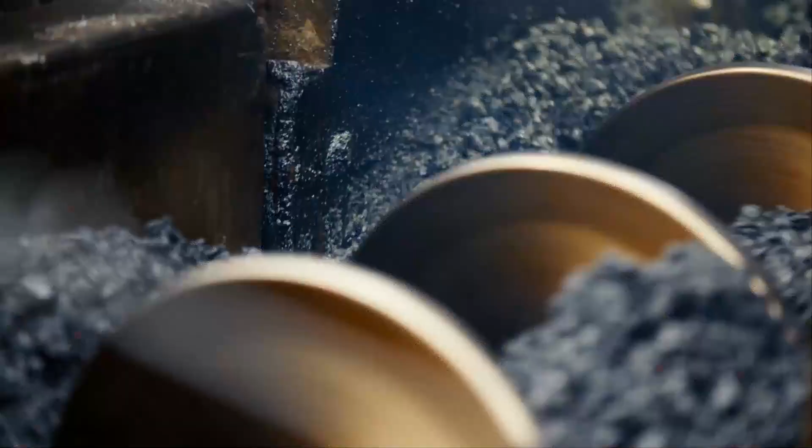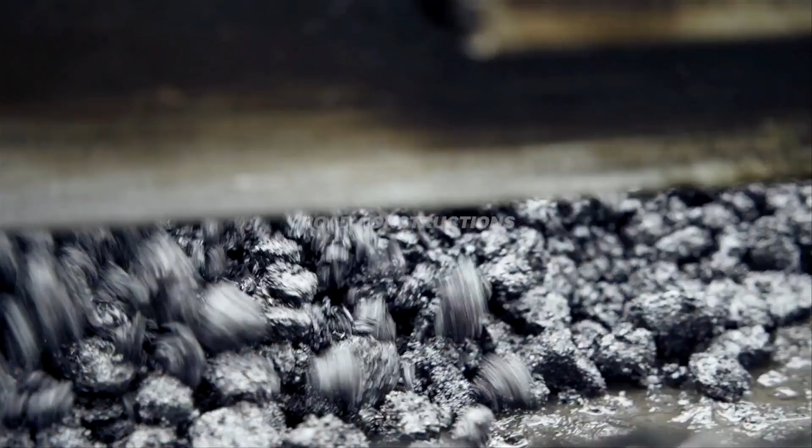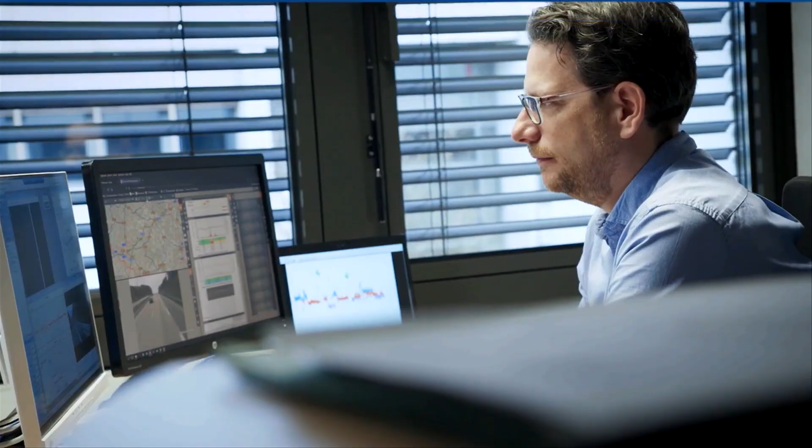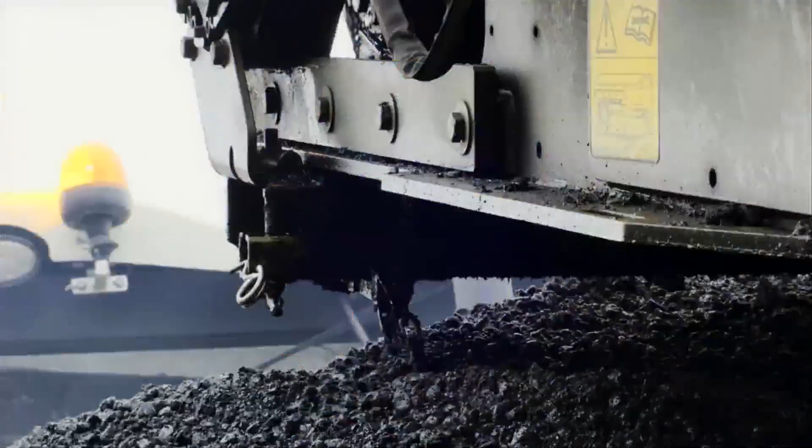What does it take to make a journey smooth and enjoyable? Most of all, it's the road itself. A good road surface is often taken for granted, but every smooth road is the result of a deep understanding for road construction, management, and interpretation of data. The FEHRL initiative, BDPAVE, brings together the expertise of 32 road research institutes and their newest scientific findings across Europe and beyond. Working closely with infrastructure owners, FEHRL has access to unique domain knowledge, like construction plans, road condition, and traffic load data. Data that builds the foundation for smart pavement deterioration models that make roads more resilient. In BDPAVE, we collect traditional and new data sources with cutting-edge technologies to turn big data into smart data, relevant and actionable. Our models will help better predict deterioration of road surfaces so that maintenance measures can be planned and undertaken ahead of time, with minimum investment, keeping the impact of roadworks on traffic flow low. A smooth journey is something everyone hopes for. Let's create it together. To discuss how you can get involved, get in touch at bdpave.eu.

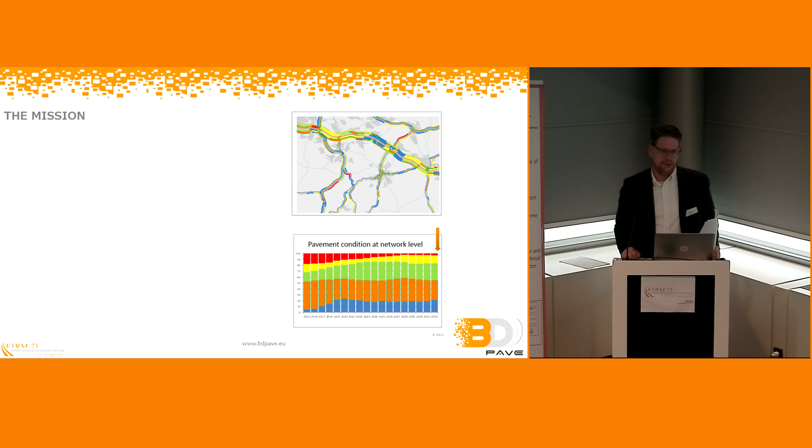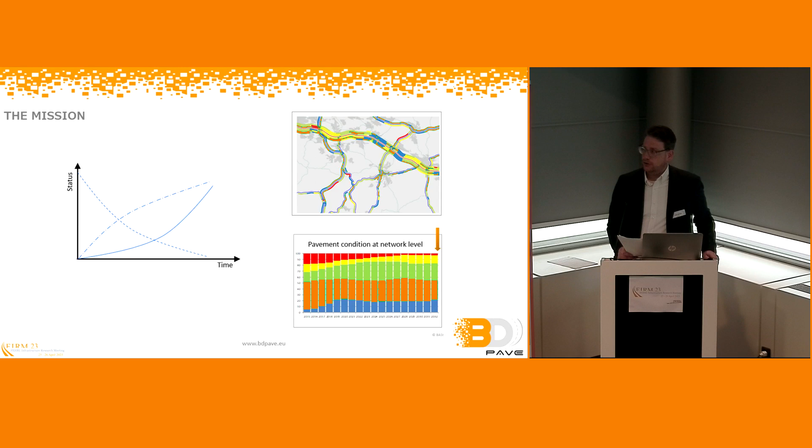So you see, it's all about pavement management, and as you know, pavement management is to find the best solution for your network, depending on the status of the roads, of the pavements, as well as the available budget. These processes among pavement management are mostly standardized and well known. The heart of the pavement management systems are these kind of behavioral curves. With them you can make the prognosis of how the different aspects of your network will change. These behavioral curves are mostly based on empirical evaluations and empirical values, and they have room for improvement - they are as simplified as this very simplified example here.

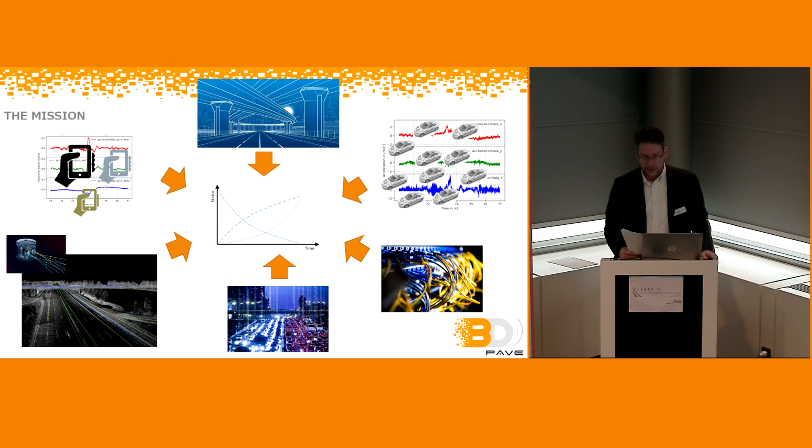Nowadays, the large and partly unused amounts of data we can use to refine or update these behavioral curves. We have vast amounts of data available, at an enormous speed, mostly also more or less in real time. The data is there virtually for all parts of the network, and for most data sources it doesn't make any difference if it has been collected for project level or for network level application. But the hurdles to use this data are still enormous. There are challenges in data quality, data accessibility, the interfaces, even in the definitions, and of course in data processing in general.

The mission of BDPAVE is to overcome these hurdles and challenges, and to bring knowledge and experts together to discuss that and find solutions. So BDPAVE is more or less a knowledge management point, a knowledge management system, and a platform for achieving a common goal.

The goal is to screen the whole processing chain of turning big data into information or into smart data to achieve improvements in asset management. And therefore, we look out what kind of information, what kind of projects are out there, what kind of finalized projects, running projects or planned projects. And we try to bring this knowledge together for our common goal.

These projects have a wide variety of topics. So it's about object type libraries, about BIM, about the use of smartphone data or floating car data, and so on and so forth. BDPAVE itself is organized in work packages.

This helps us to work in this initiative. So we want to look at what is the best practice done nowadays, to find out what is missing or what can be improved. Even on the data sets, we ask ourselves what is missing, what is needed, and how to access the data. This is a very crucial point.

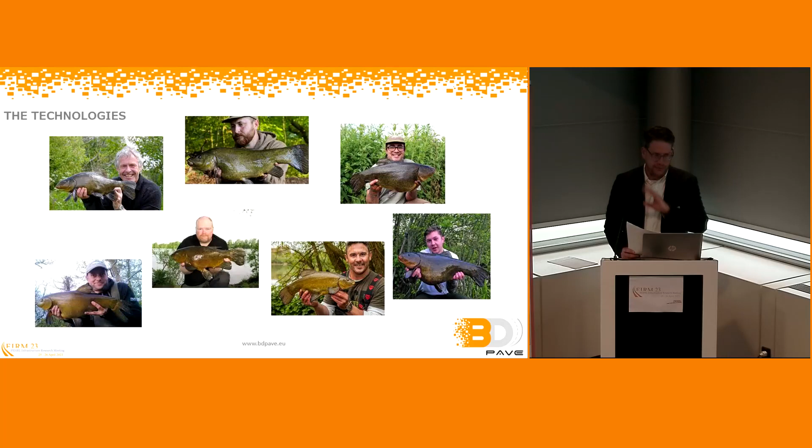It turns out it was not the shape of the fish, and it was not the fish hunter who identified the tench. It has been the fingers. So every time the AI saw a fish with fingers, it said it's a tench.

So simple. So what does this have to do with pavement engineering? Something—I will tell you. Think of surface images. We want to use AI to dig through our surface images. Imagine how hard it is to tell a computer what is a crack, what is an alligator crack, what is a sealed crack, what is a joint, and what is just a line made of dirt on the surface. This is the same problem.

It all depends on the input and the output you gave for training. The good thing is that these problems are always the same. It doesn't make any difference if you're talking about fish, pavements, medicine, or whatever—the problem is always the same, and so are the technologies. So we can easily adopt these technologies to our problems, for example when it comes to pavement management.

And BDPave tries to provide the framework for this. So we started by conducting a survey throughout Europe, asking pavement management people what kind of data they have, what kind of data they need, and what kind of data they are missing. It turns out the data situation is quite good across Europe for pavement management, but there are still some data sources hard to get, like bearing capacity data, and data wanted now or in future, such as environmental impact and sustainability data. But we are on the right way.

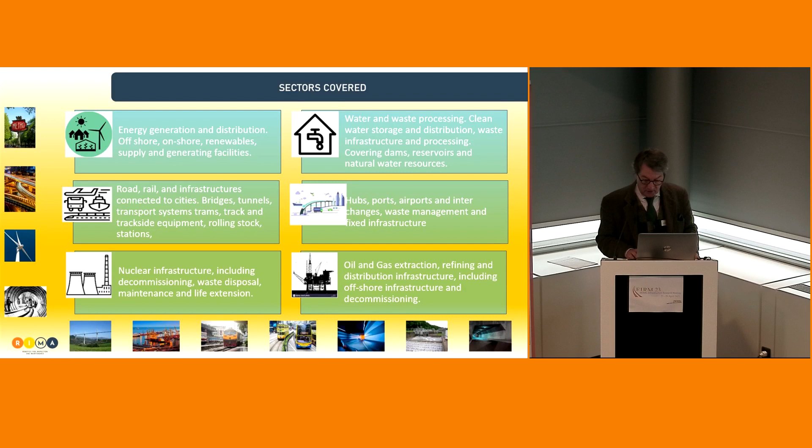One of the interests that we realized when gathering all these sectors is that most of the time and frequently there is a commonality between the problems that people could have, for instance in water supply and sanitation, and in nuclear or in oil and gas when it's about inspection of pipes.

So many commonalities between the domains, which helps also the SMEs that we were supporting to develop their market. So the SMEs, how did we reach them? We organized 2 open calls to distribute these 8 million euros with grants starting from 100 kilo euros to 300 kilo euros, and experimentation lasting from 6 months to 12 or 18 months.

We selected these experimentations that applied to the calls with external experts to avoid introducing bias in our evaluation.

And all along the runtime of the experimentations, we were mentoring them to help develop their solution, bringing our expertise as research and technology organizations and universities to really develop their product and services, to help them be successful.

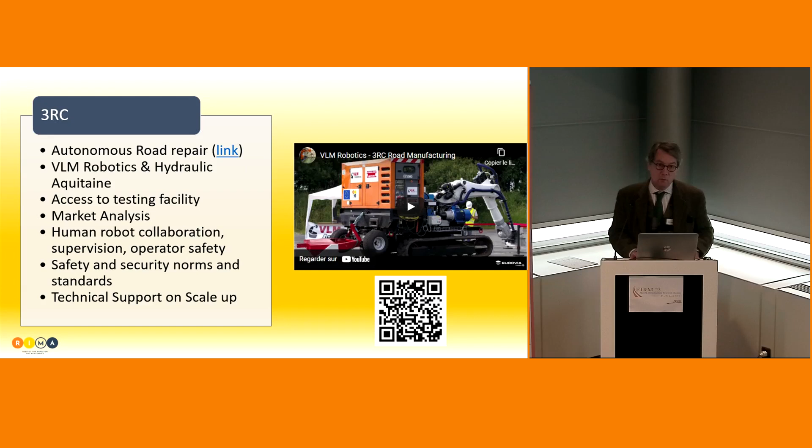So that's a product now that is available, and generally we were willing to reach a maturity level of TRL 6, 7, having some proof of concept and/or prototype, but there is still some effort to do afterwards for the SMEs to make a real product. This is what we were really focusing on for innovation.

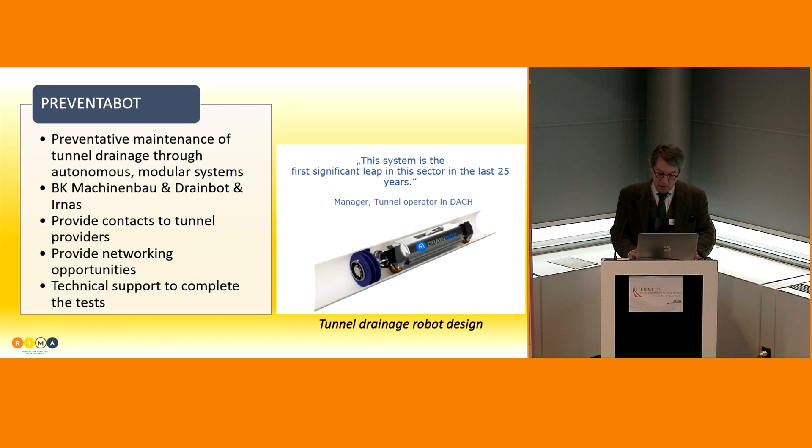This makes the specificity of inspection and maintenance of infrastructure with respect to robotics: we cannot have one solution which will be applicable for every issue.

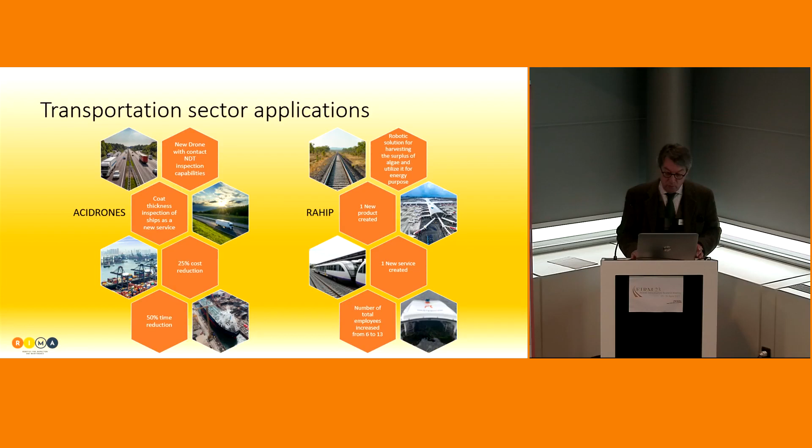Inspection and maintenance of tunnels also, the road or railway tunnels, to avoid accidents and procure some safety for operators in this inspection, and also reducing the cost and time of this inspection. We also have these flying drones with fixed wings to do some inspection for roads. So this is to show you this vast variety of technologies and robots and services that we offered also to the SMEs.

In total, we are trying to measure the impact of our activities in RIMA. At the moment, we know that there is at least 16 new services that were created and that are operational out of this 50 experimentation, and 25 new products. And the SMEs that we supported were able to raise funds, which represents at least the same amount of money that we gave them for their support, so direct contracts, and we think that this demonstrates the success of the network.

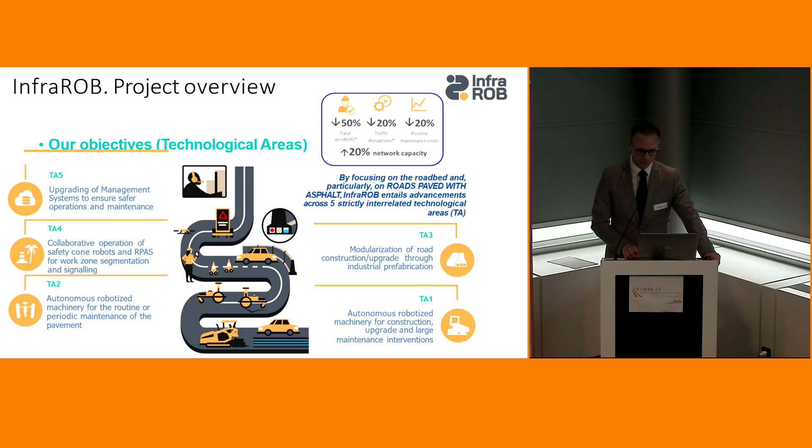So within this project and within each of these technological areas, we are developing a number of solutions. I'm not going to go into detail for all of them, but I'm going to mention each of them. So the first one is about the autonomous tool that we are developing.

It's an autonomous and autonomously-working road construction train, and this train includes a feeder and a roller. As you can see in the picture, this is a tool we are currently developing. We are about 30% of development at the moment. This tool will also include, at the bottom, a specific device for the automated laydown of fiber optic cables during the paving process. This is something we also want to integrate directly into the pavement, and we are about 10% of development on this. It's a new project, about a year old, so things are under development.

There is also another application that we are developing for potholes. We are developing a prototype to fill the potholes, and at this level we are about 40% completion. Something I also need to mention is all our applications are for asphalt pavement. We are not dealing with concrete pavement, they are all for asphalt pavement.

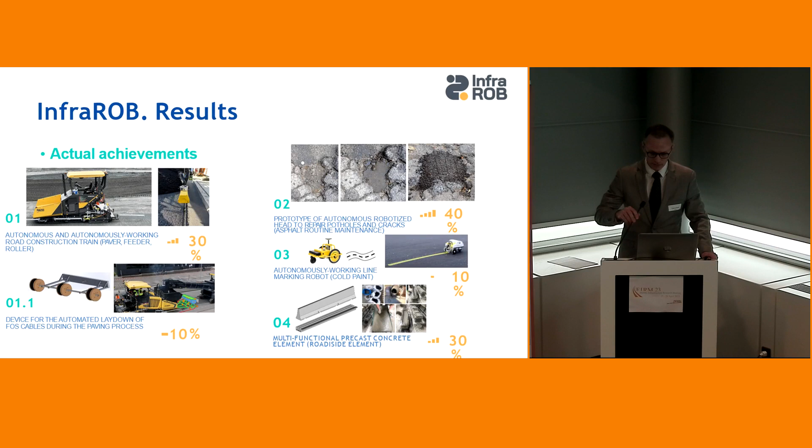In the modularized aspect, we are developing multifunctional precast concrete elements to be used on the roadside. This can embed a number of spaces for wires, for drainage, and a number of signalization aspects as well that are embedded into the system.

We also have other products under development. The other one is about collaborative operation between safety cone robots and RPAS. That's something we are working on at the moment, about 20% completion.

The other aspect is about pavement management systems. We are currently developing an upgrade of the pavement management system, taking into account the introduction of robotics. That's a very important aspect because at the moment that's not done at all, so this is a new integration that we are doing.

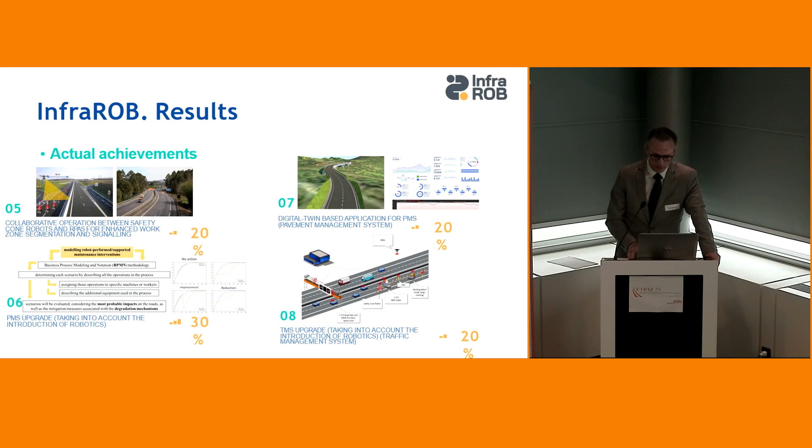We are also moving on products or services based on digital twins, applied to the pavement management system. Last but not least, we are also developing an upgrade for the traffic management system, also taking into account the introduction of robotics. That's something new we are going to develop, and we are about 20% of development on that.

In terms of results, it's hard to say since we are still far away from the end of the project, but we already have some results and some that are coming. We already have a patent developed for an autonomous paver sensors control system, which is in its last stage. We're also aiming at IPR protection for asphalt mixture to repair small potholes and cracks by the additive producer.

We also have, combined in product and service, an autonomous line marking robot and support, the RPAS system for monitoring work zones, an upgrade of existing PMS solutions, and a fiber optic solution for pavement damage detection. In purely product-oriented results, we have this multifunctional precast concrete system and the digital twin-based add-on application. So in everything I mentioned earlier, there are quite a large number of products or services that will be available at the end of the project.

All of them should be reaching TRL 7. So that's a very large ambition. This means that they're almost close to introduction into the market.

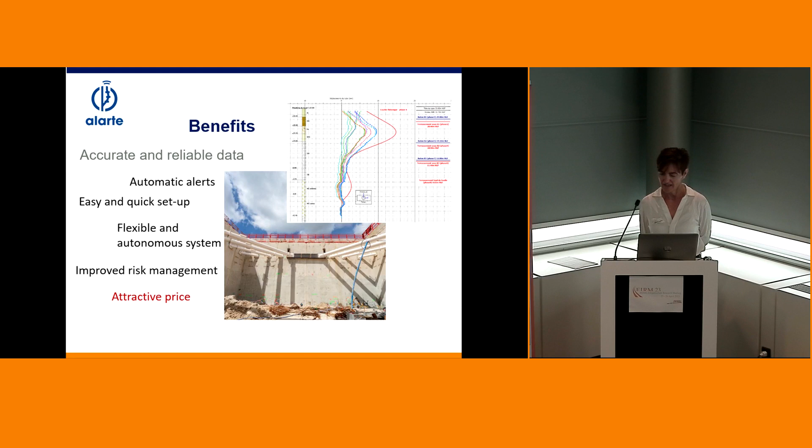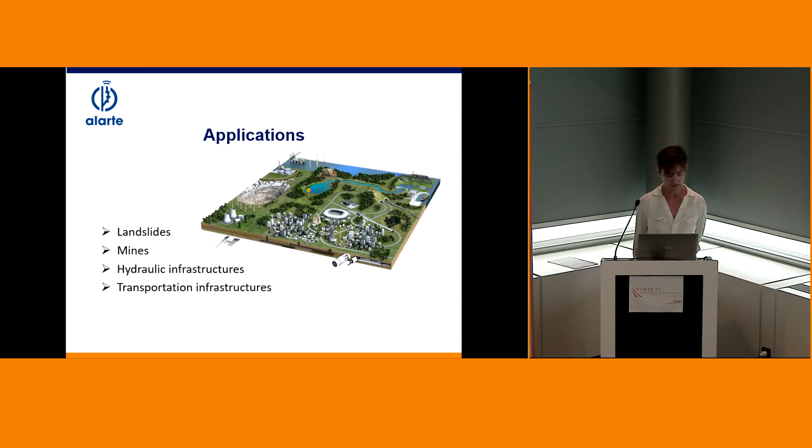As I mentioned in the video, it can be applied to monitoring landslides, mines, the stability of hydraulic infrastructures, and transportation infrastructure. Now we are currently validating the prototype. It's been installed at the construction site in Murcia.

It's ADIF's site. They are building Murcia's arterial railway - I think it's a high-speed railway. We've installed Alarte inclinometers in 5 zones with different movement expected.

We've installed at each section a couple of inclinometers on both retaining walls. It's a cut and cover excavation, and we have installed them there. And we've also installed conventional inclinometers to check whether they perform the same or not.

And up to now, we've found out that, after making some adjustments, it's very reliable and accurate as compared to a conventional inclinometer.

And one of the main problems here, as it's an urban environment - because it's a railway station - we have vandalism problems, which we are trying to solve, because it's fed by a solar battery. So we've redesigned the system to make it more difficult to take it.

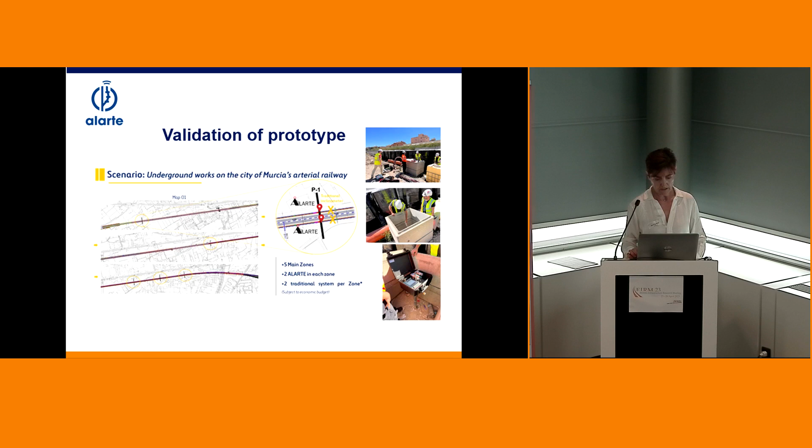There are different options for the different setups. So this is the output you would get from your office if you call the inclinometer and make it move, and then you get the result of the movement.

Okay, so I think that's the end of my presentation.

Thank you, Maria. Very interesting to hear about a project that would deliver a product so close to the market. That's one of the first times I see that. I heard something about a fast-track innovation project, so for me, it's very interesting.

So, do we have any question in the room or maybe online? I do not think so - it seems we have no reaction.

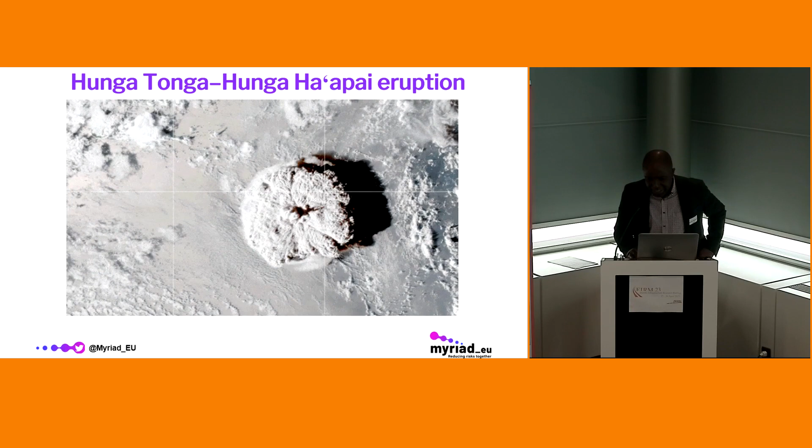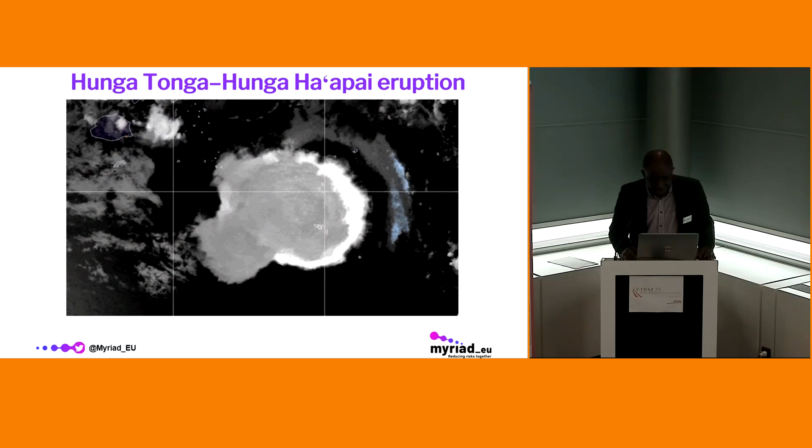So in December 2021, an eruption occurred in Tonga called the Tonga eruption, leading to large direct impact on the surrounding areas. It's reported that at least 4 fatalities occurred, many were displaced and injured. Ash covering and destroying buildings and infrastructure, lack of clean water, impact on agricultural production, etc.

This eruption led to many other impacts. For example, it led to a tsunami very close to Tonga itself, but it also caused damage in the harbor of Santa Cruz in California, right across the Pacific. Impacts of the tsunami were also felt along coastlines in Peru and Japan.

Due to the fact that Tonga was hit by both a volcanic eruption and the tsunami, they were in need of humanitarian aid delivery in terms of food and water. Unfortunately, the aid delivery also delivered the coronavirus to the island for the first time, making it even more difficult for the island to recover. So this example showcases that the interaction between various hazards can lead to a greater impact than the sum of a single event.

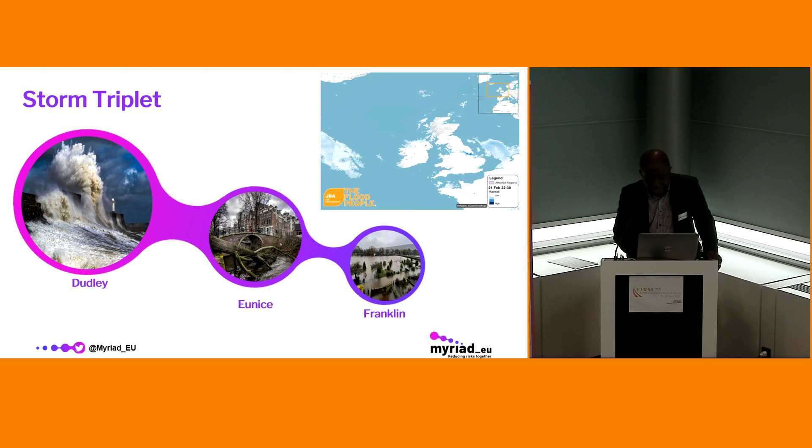So the impacts: the storm Eunice caused about 20 known fatalities with multiple injuries, together with the economic damage of the 3 events, which was quite huge. Millions were left without power, and there was prolonged disruption to travel and business. So this shows that consecutive impacts can build up compared to a single event.

Within this project, we are addressing several issues. Firstly, that multiple hazards can have interrelated effects on risk, and there are many ways in which this can occur. You can see the 4 different examples I'm about to talk about. For example, the triggering: one hazard can trigger a different hazard, such as intense rainfall triggering landslides.

Regarding amplifying, the combination of different hazards can amplify the likelihood of other hazards occurring. For example, during hot and dry conditions, the chances of wildfires can be amplified. Then there's the compound effect, where more than one hazard can occur at the same time, for example when river and coastal flooding occur together in a delta, which can lead to very large flood disasters.

And then consecutive hazards, as shown earlier, can also increase the risk. So the key question we're asking here is how can risk be better managed by considering these interrelated effects?

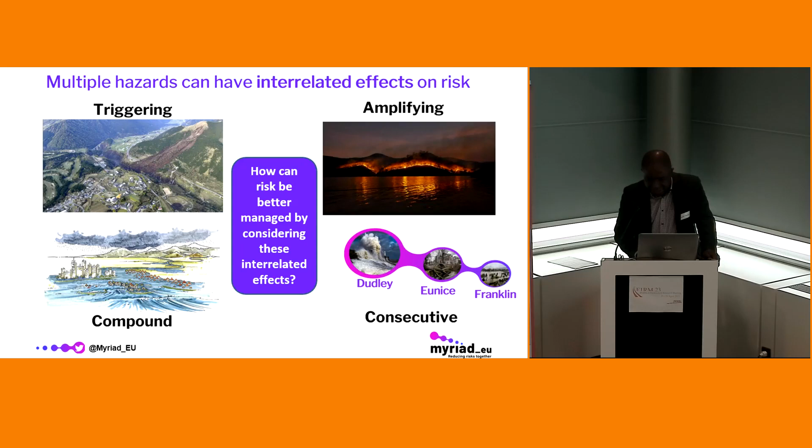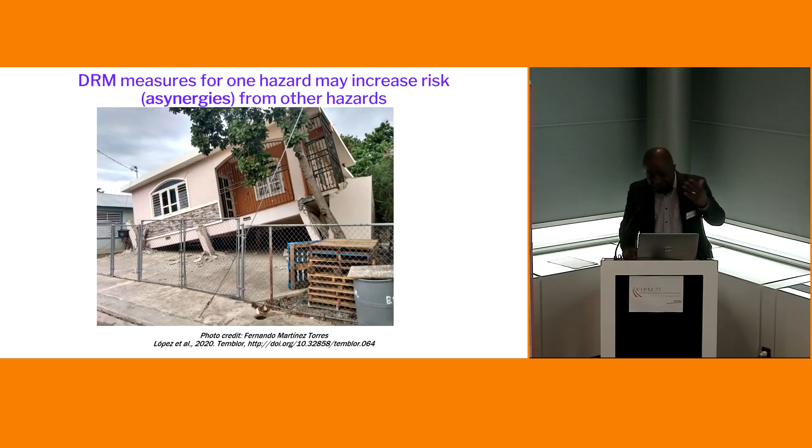Secondly, we also know that disaster risk measures taken to reduce risk from one hazard can sometimes actually increase risk from another. The example you see on the screen is a house built in a flood-prone area, built on stilts. While this makes the house less vulnerable to flooding, as the photo shows, it actually made it more vulnerable to shaking during earthquakes. So the question being addressed in this project is how can we better account for these dynamic feedbacks between risk drivers.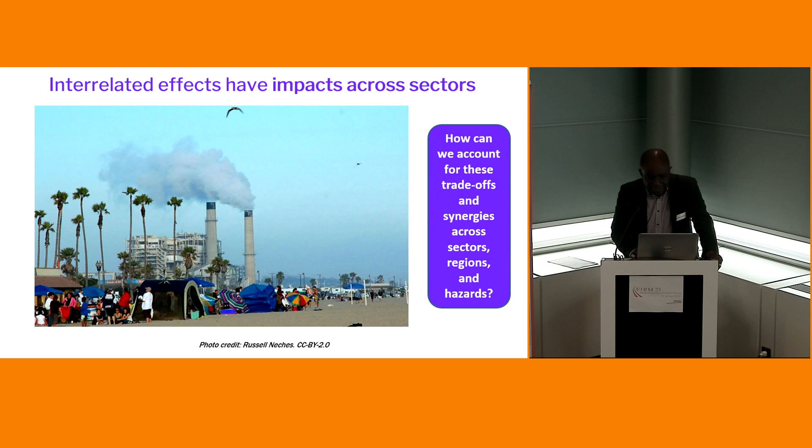So the vision of the project is to catalyze the paradigm shift required to move towards a multi-risk, multi-sector systemic approach to risk assessment and management. In other words, not to take risk or look at hazards as single hazards, but look at the combined effects of all these issues. The overall aim is that EU policymakers, decision makers, and practitioners will be able to develop forward-looking disaster risk management pathways that can assess trade-offs and synergies across sectors, hazards, and scales.

What is being done in the project is that in each pilot, we first define a sustainable challenge. For example, for the Danube region, we have quite a number of sectors, and we consider how to take resilience into account. Then we involve stakeholders from different sectors to discuss ways to achieve that challenge, and in doing so, we address all the different possible hazards and combinations of hazards. For each pilot, there are different possible hazards affecting different stakeholders, and we work together involving stakeholders to discuss ways to achieve this challenge.

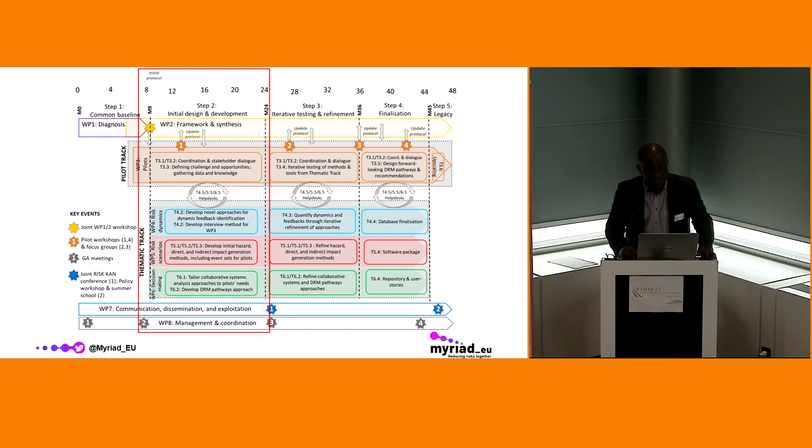The project itself is divided into 5 steps. The first step is about the diagnosis, where we bring together all the stakeholders to get an understanding about each other's perspectives, the way of working, the challenges, understanding past methods, models, tools, policies, governance of multi-risk management, etc. This has been achieved, and then the second step is the development of an initial framework for multi-hazard, multi-sector risk management.

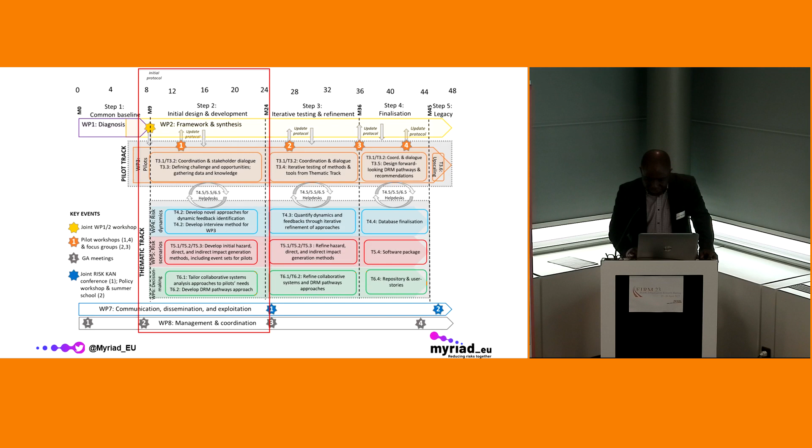I'll go through some of the results achieved so far. The project started in 2021. We have a handbook of multi-hazard, multi-risk concepts, definitions, and indicators, two reports actually - the handbook and a report on policies. There's also an online wiki platform that has been developed, and pilot workshops have been completed, etc.

I'll briefly show you these two key handbooks and reports that have been developed. The first one, the handbook of multi-hazard, multi-risk definitions and concepts, brings together important terminology and definitions used in the multi-risk literature, as well as giving an overview of key indicators and approaches identified in the literature.

In addition, we've also developed a report on policy making, processes, and governance for multi-hazard, multi-risk management. The findings of these two reports have been used to populate the wiki platform.